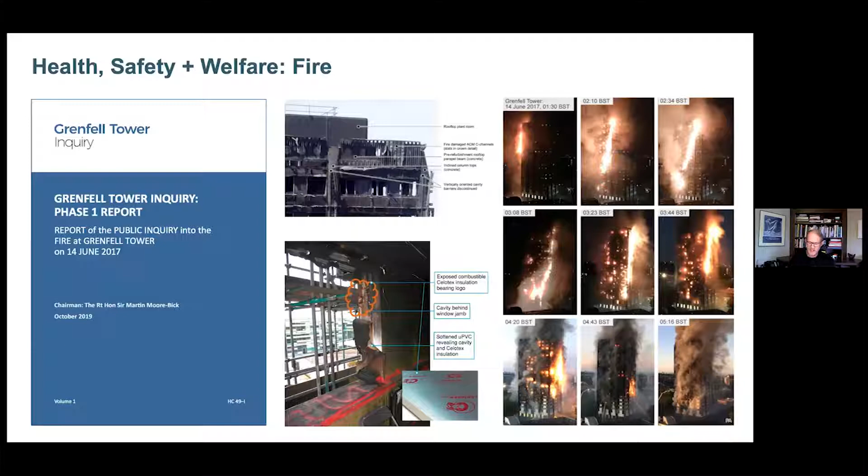Like climate change and the relationship of the building industry's contribution of carbon to the change in the atmosphere—that is becoming more and more apparent.

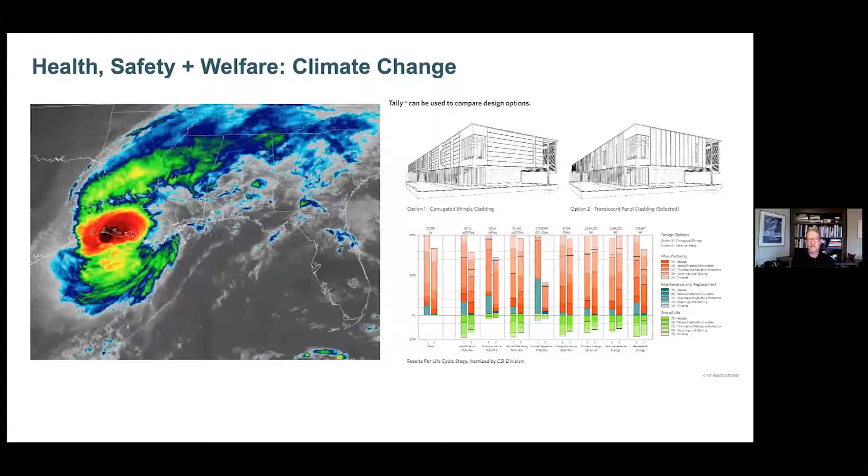There are lots of discussions going on now about issues of social justice and racial equity, and we have to start questioning ourselves about the role of the built environment in instantiating some of that inequality, and what role architects, engineers, and contractors play in creating the physical context in which those things happen.

And then something that's become top of mind, particularly for those of us in education, is that suddenly there's a strong correlation between public health questions and our skills as AEC professionals.

I suddenly found myself, as a full-time academic now—I thought I was going to get to spend the summer writing a book and doing some research and taking a bit of a respite. That turned out not to be the case, as we spent the entire summer operating as architects, with our consulting engineers and other consultants and our colleagues from the public health school here at Yale, the medical school here at Yale, and the nursing school here at Yale, trying to figure out how we were going to actually open our building here.

This is the Paul Rudolph building at Yale, where the School of Architecture is located.

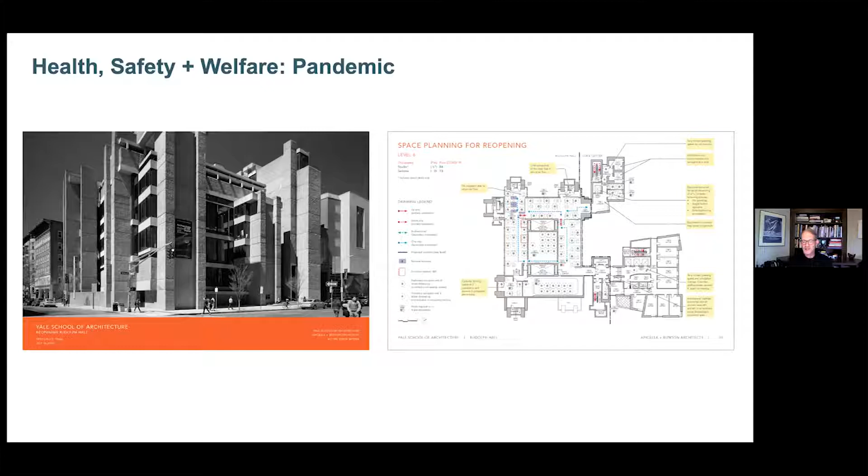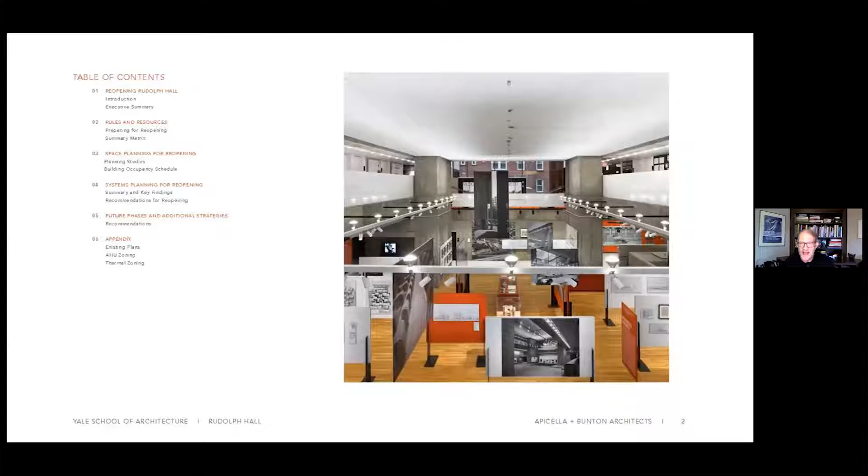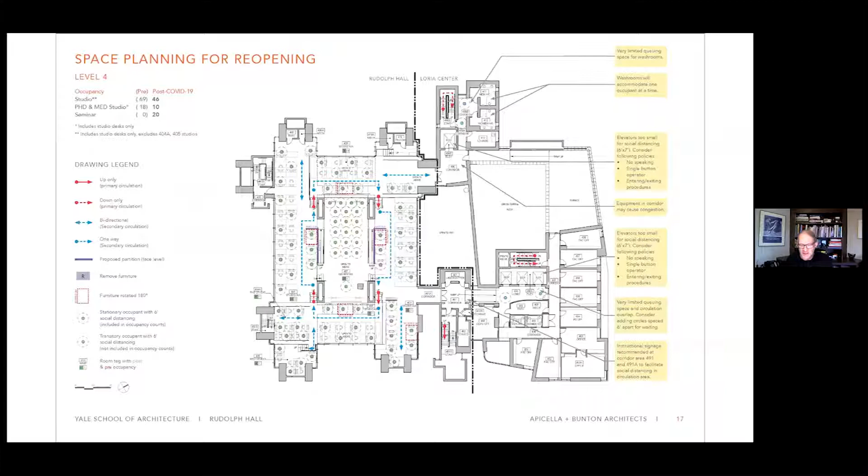We spent an enormous amount of time deploying our AEC skills in the service of figuring out how to run a building during a public health crisis, doing detailed planning of occupancy, circulation, and air quality, generating lengthy analyses that we used to present to the university administration to show we really couldn't teach architecture entirely remotely. We had a plan for how to make that happen, going through our building and analyzing every possible constriction that might create a potential public health hazard, analyzing all of the systems of the building through a lens we had never really considered before.

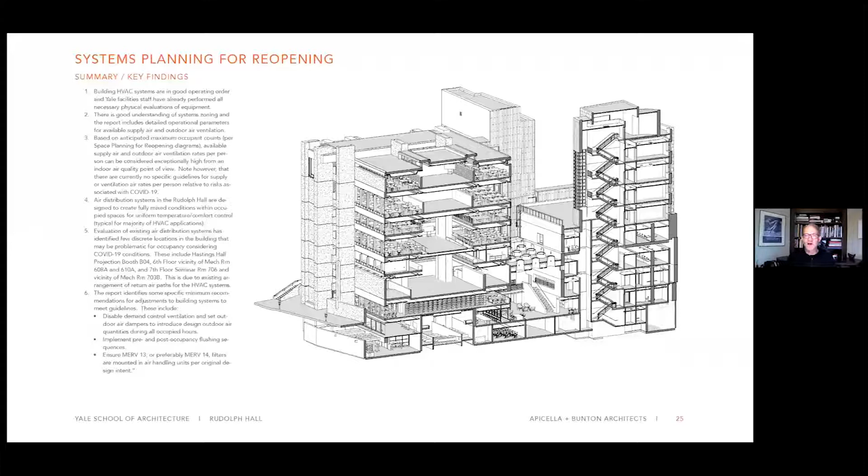We looked at what happens during a fire, how we have to redesign the building in terms of its graphics to make it operate properly, and then studied the building in extreme detail to figure out how we could occupy it to meet our pedagogical goals, allowing people to be in a studio setting while not over-occupying the building, respecting its need to change its air. We ended up doing an enormous amount of what I'd call meta-architectural work, applying architectural planning principles on top of our existing building.

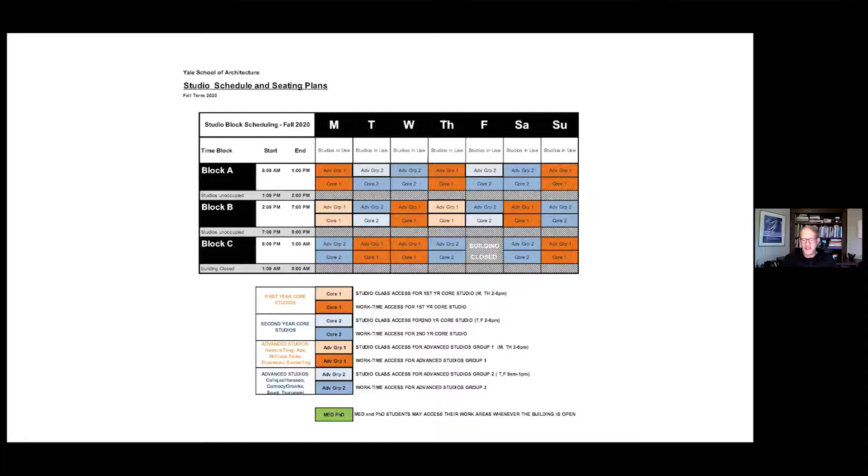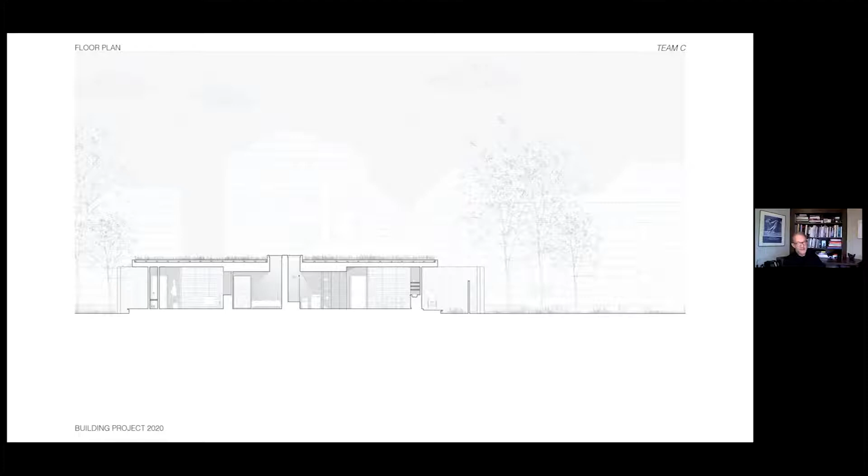So we had to reframe the entire building project this year. The students were building a 2-unit house for a homeless services organization here in New Haven. We had to reframe the entire problem so our faculty and a few of our recent graduates could act as the construction crew. Our students spent the time they would have spent doing construction really thinking carefully about how to prefabricate, sequence, and deliver this project in a much more profound way than they would have in past semesters. In past semesters, they would have done a set of light working drawings, and part of the experience was to go out into the field and figure it out there.

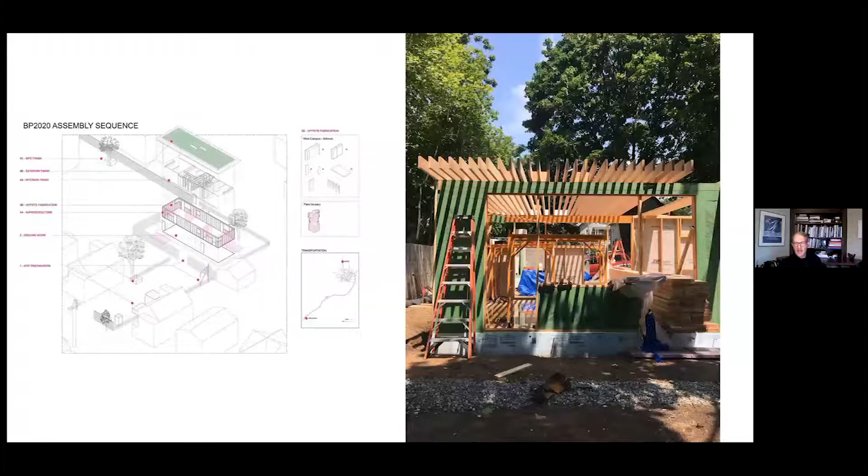And now they are having to think much more deeply about what the relationship is between these pieces.

At the same time, we're teaching a second course this semester which I think is super interesting. It's a project we're doing for the Peabody Museum, our museum of natural history on campus that does a lot of field biology work. My colleague Alan Organschi, who studies the circular carbon economy, is taking a group of our recent graduates. There was a seminar for students who were going to graduate last spring, and those students, having graduated, could become construction workers. They have designed a building for the Peabody Museum that's going to be built on one of the small islands off the coast of Connecticut—a research and classroom building based on these principles of the circular carbon economy.

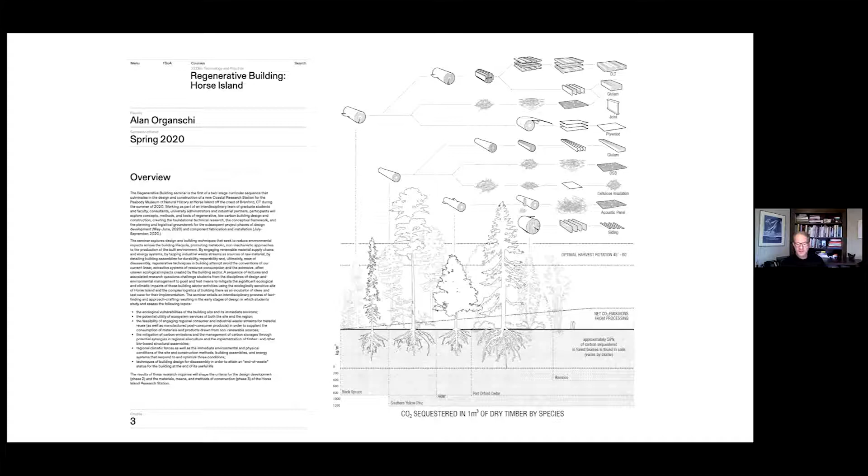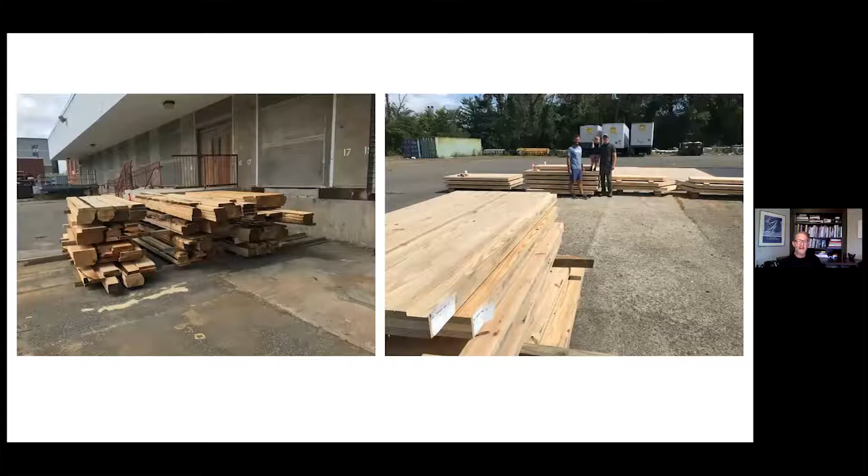So they were doing things like collecting abandoned CLT panels from the Bureau of Alcohol, Tobacco and Firearms, who builds these temporary CLT structures and then tries to burn them, or harvesting hardwood from the Yale Forestry School's forest up north in Union, Connecticut, and using these materials to try to prefabricate in a warehouse, to pre-formulate a project in a warehouse.

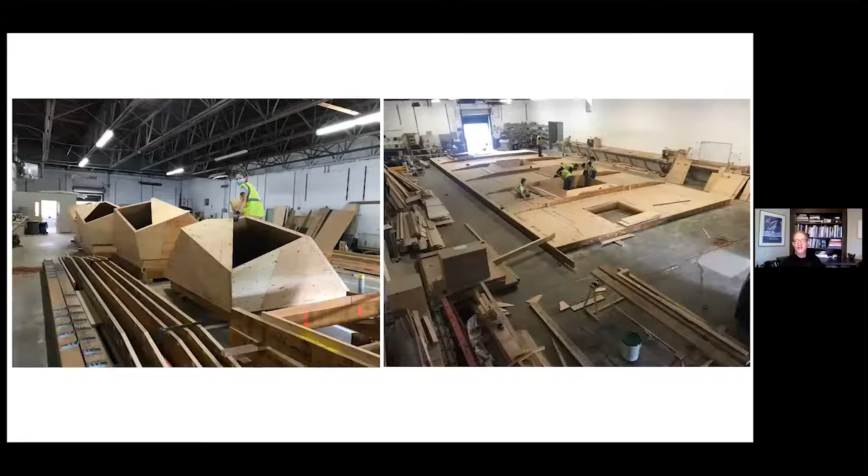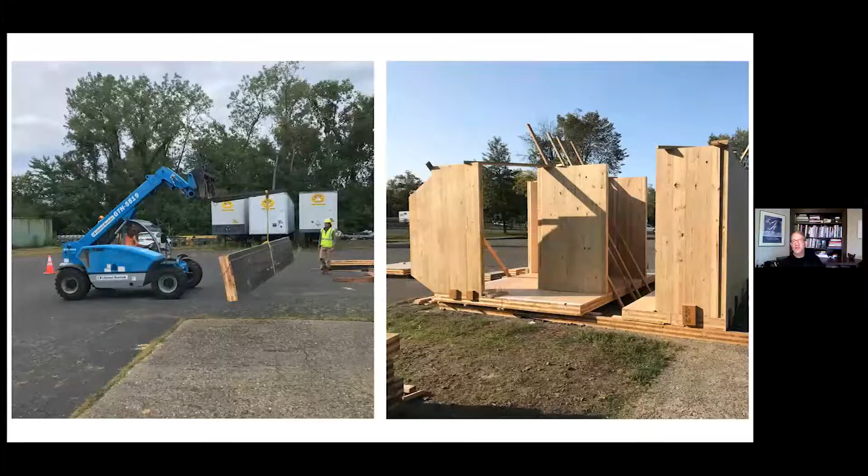You can see our recent graduates, now construction workers, prefabricating this building in a warehouse, coordinating all of the individual pieces, figuring out how to pack and ship them, practicing the construction of the prefabricated building outside of the warehouse where they're doing the prefabrication.

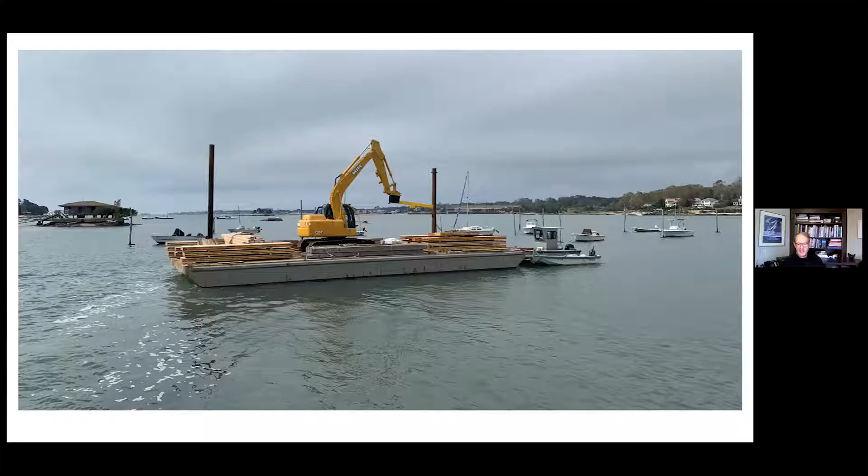Then they had to put the entire building on a barge and drag it over to this island, and then build a foundation and assemble this building on site.

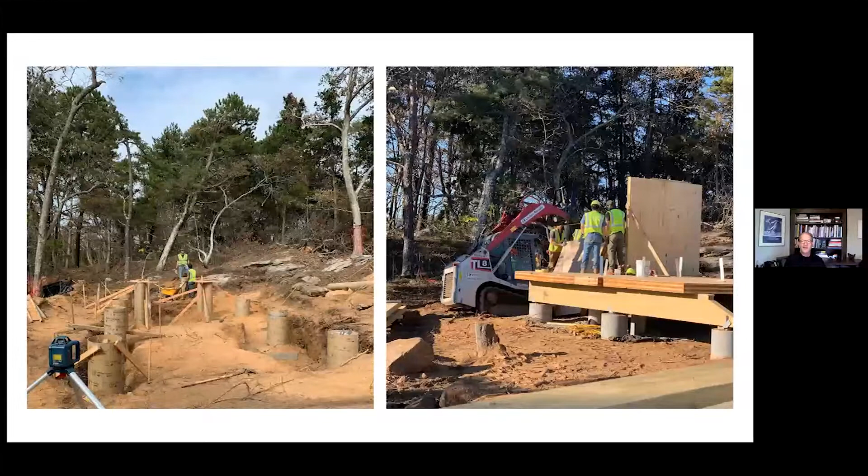And so what you're seeing here, even in a school, even in a place like Yale, which is primarily an institution focused on training the next generation of top designers, is a complete refocus on the end-to-end relationships between what happens as a decision maker, as a designer, and what the implications are of that decision all the way out to the end of the supply chain.

And so the question is, what does this really mean? And could technology accelerate that?

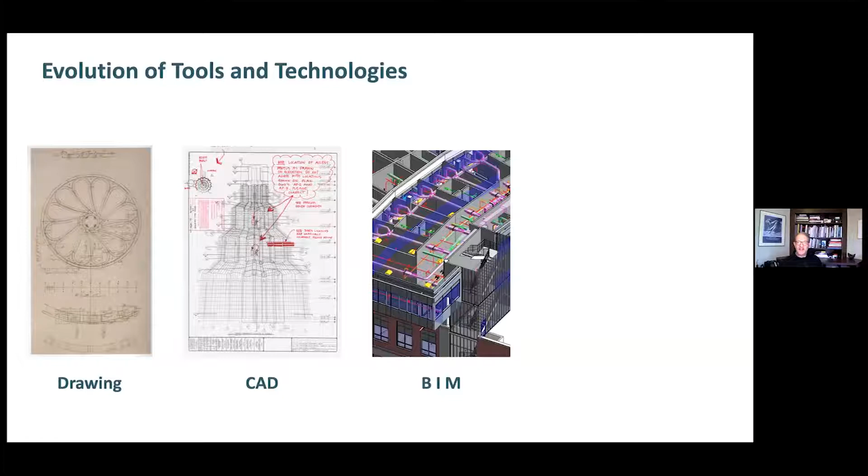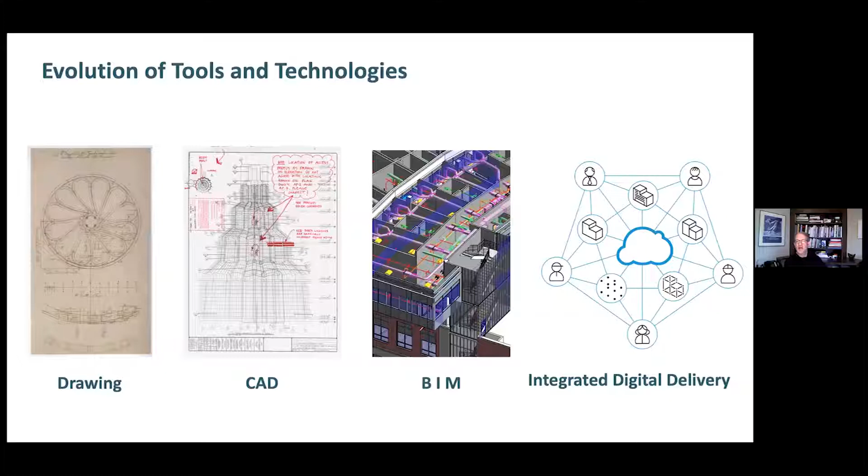When I was at Autodesk and we talked about how technology would change the building industry, we always argued that it's technology plus a couple of other extra factors. In the beginning of the BIM argument, it was the inefficiency of the building industry and razor thin margins. Now the problem has become bigger because the perspective on the kinds of challenges the industry needs to face are also becoming bigger. And so this idea that maybe there is a virtuous relationship between the pieces of the building industry as it becomes digitized might be the technological catalyst that would move us forward in that direction.

And so between Autodesk and coming back to Yale full time, I wrote this book called Architecture, Design, Data, Practice Competency in the Era of Computation.

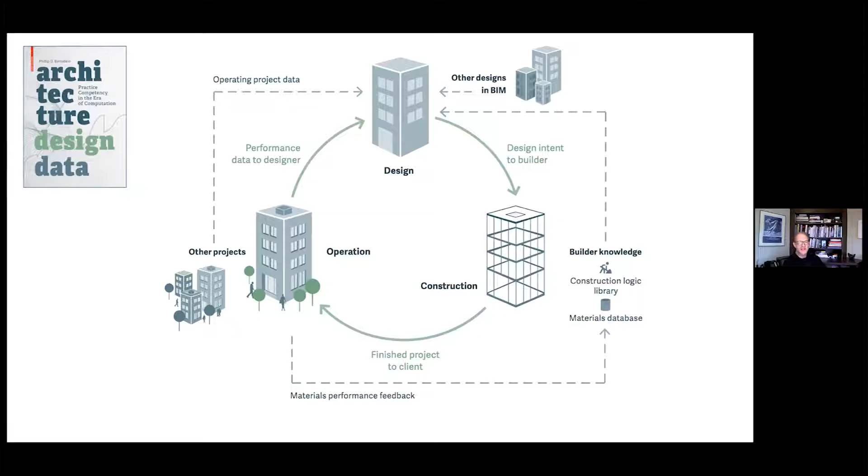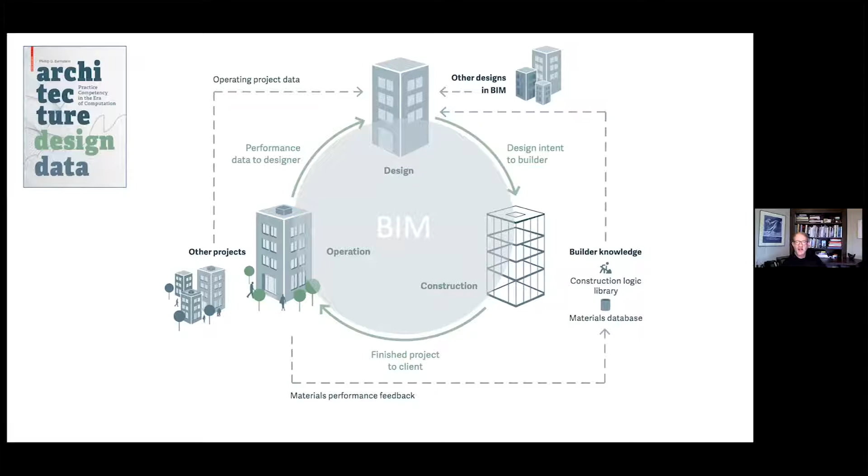Because what's really happening, in my opinion, is what I'm going to call representational dispersion. In each stage of the building process, what seems to be happening is each phase creates its own digital infrastructure and replicates the siloed processes that the paper-based process used to reflect. So you have different tools in conceptual design, different tools in building during design development and construction documents, different tools used for producing shop drawings, different tools necessary for representing and managing construction.

And now you're seeing another issue start to emerge, this thing called the digital twin. I don't even know what that is. It's some information from the Revit model, information from the Navisworks model, information coming from the owner's building control system to create something called a digital twin. But really what a digital twin is, if it were really working, is a concept that's more like Big BIM, like maybe all this stuff has a rational relationship to one another.

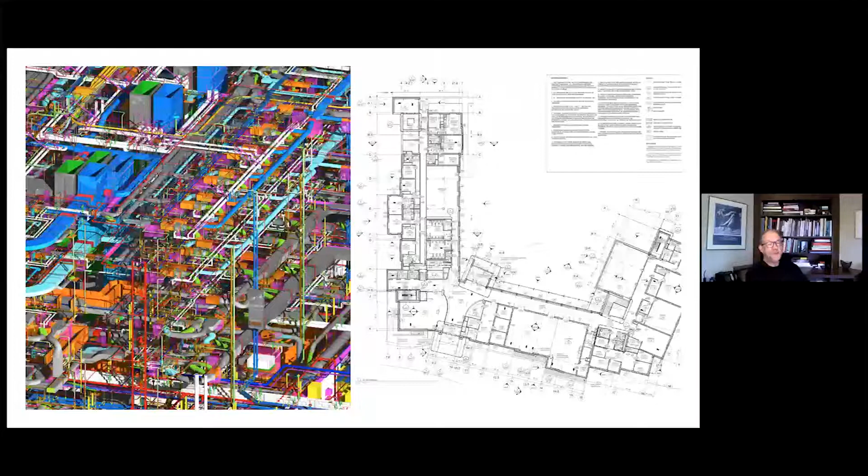But maybe now we're at that moment, because we're at an economic existential tipping point. We've got a lot of venture capital pouring into the building industry to improve the technology.

And we've also attracted the attention of the broader business community in the form of, for example, our friends from McKinsey, who've suddenly decided that construction is cool, and they're writing a lot of reports about it, including one a couple of months ago called The Next Normal in Construction, where what they essentially assert is there are interesting things happening in construction, and we're going to tell you what they are.

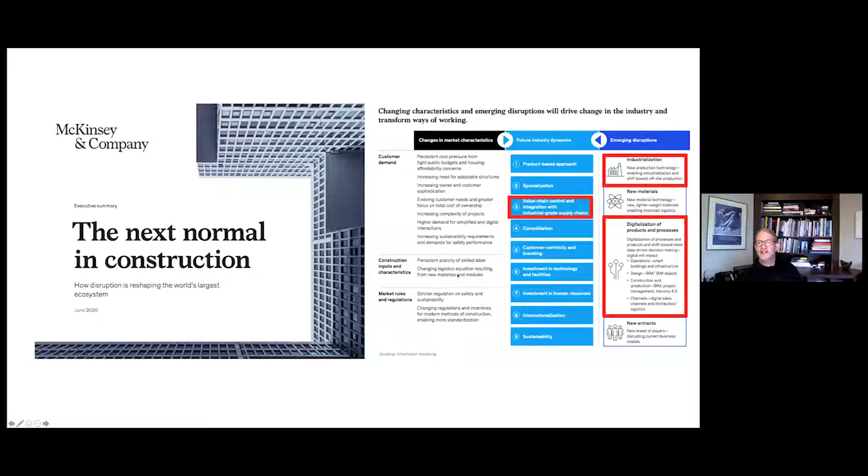If you really think about them hard, what you're going to realize is that there's industrialization happening in the building industry—in other words, prefabrication—there's digitization, but the future industry dynamic that they identify that's most interesting is value chain control and integration with the supply chain.

So this theme that I've kind of identified, that's related to some of these broader challenges, might be catalyzed by technology in a way that changes the nature of the industry.

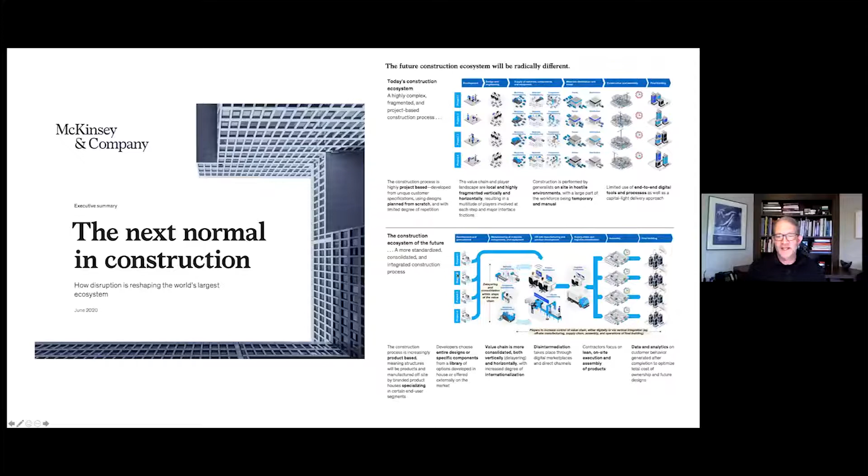So we'll stipulate that that's an interesting vision from McKinsey that's very optimistic, but the coefficients of friction are very high. However, there are beginning to be indications out there that some of this kind of supply chain integration is starting to happen.

There are examples like Mace Construction in the UK, who has this thing called the jump factory, which is essentially they build a factory, enclosed on the job site, and slip form the entire building as a factory sliding up the building. So they're bringing manufacturing capabilities to the site.

We all know lots of examples of the Katerras and others of the world. In fact, my colleague—

Renee Cheng, who's the dean of the College of the Built Environment at the University of Washington, and I are doing a research project right now where we're trying to look at, not from the top down, not from a theoretical perspective, but from the bottom up, what are examples of players in the building industry who are beginning to verticalize by combining one or more aspects of the supply chain in their value propositions.

So they integrate suppliers with manufacturing, designers who collaborate or instantiate construction activity in their business models, different kinds of relationships. And we very quickly came up with a list of about 60 different companies that are doing some form of this.

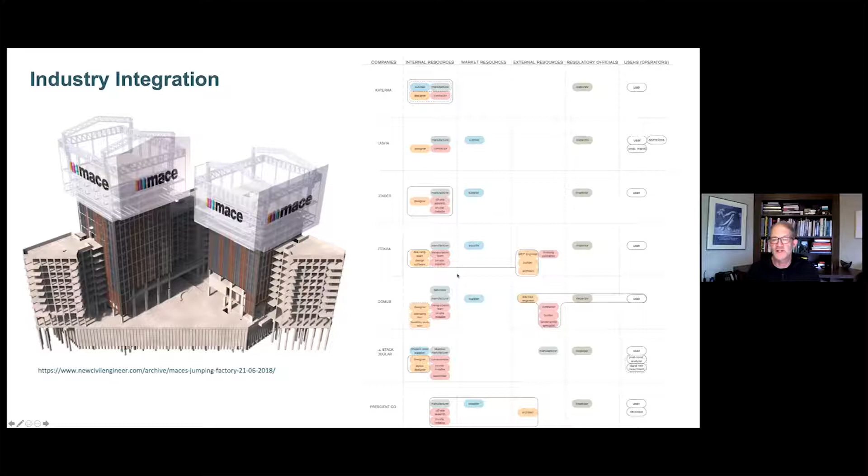So whether it's Professor Organschi's work on the circular carbon economy, where he suggests that buildings can harvest the carbon that the cities they're in create, and that carbon from that city is then stored essentially in wood products, which then become part of construction.

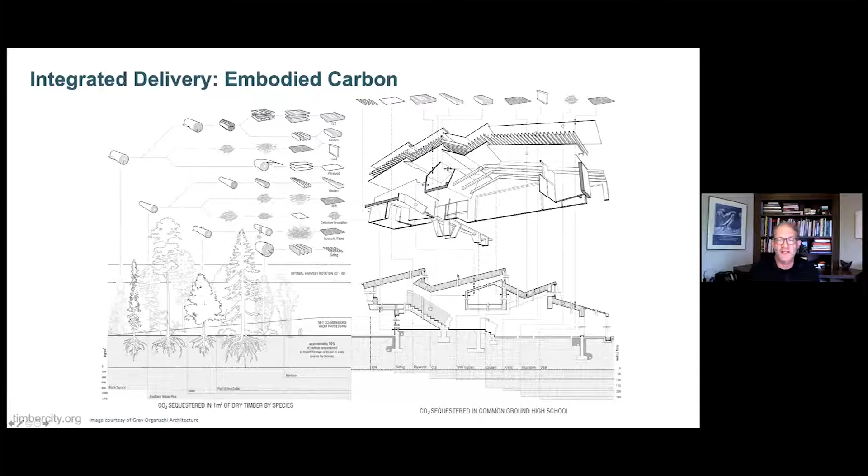So you have a virtuous circular economy.

For example, in our slavery course, I try to explain to my students that as an architect, you are 10 or 12 supply chain tiers away from an enslaved charcoal worker in the forests of Brazil who harvests wood from a tree farm that forms the charcoal, that smelts the pig iron, that goes to the steel supplier, that eventually goes to the fabricator, that goes to the erector, and that some part of your building actually has slave labor in it, even though you're 10 steps away from the process.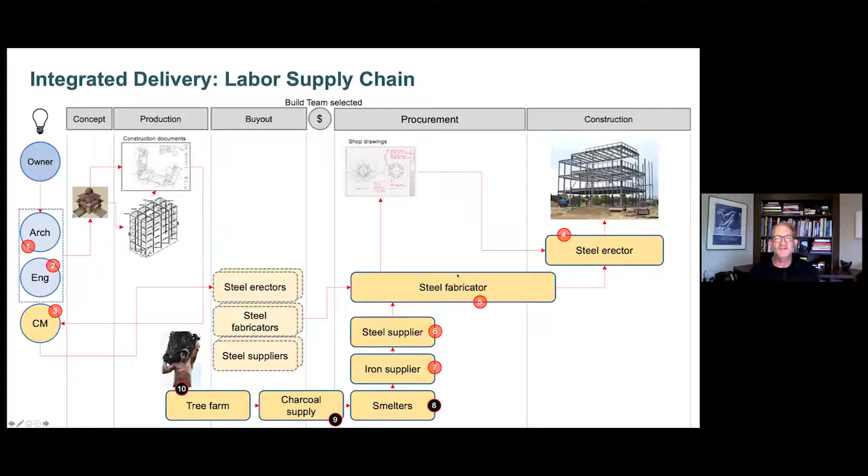If we're going to attack problems like this, whether it's embodied carbon or embodied slave labor, we've got to have a different view of the supply chain, and maybe technology is a way of doing that.

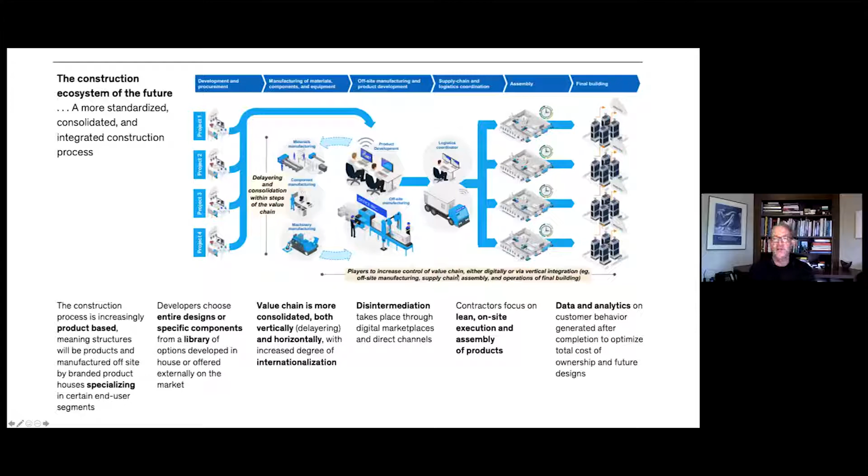What our friends from McKinsey are suggesting is one way to do that is to integrate the supply chain, create lots of information flows, and begin using manufacturing techniques to make that happen. I think that may be too simple an answer, because it doesn't address the problem of how to disintermediate, to use their term, the lack of relationship between the various players in the process.

There are likely two more technologies that might help us do that: generative design and scripting. In other words, the use of algorithms to manipulate data, and machine learning and artificial intelligence, where computers learn how to create the relationship between pieces of information by studying vast amounts of information.

What we have in AEC now is an emergent condition where BIM simulation and data management tools have created increasingly large piles of digital information with no relationship to one another.

So maybe the idea going forward is that we can understand the supply chain, we can understand the relationship between all of these processes, and we can create this idea of a digital twin that I'm going to call an integrated digital twin, by layering on these additional technologies that create the relationship between the pieces.

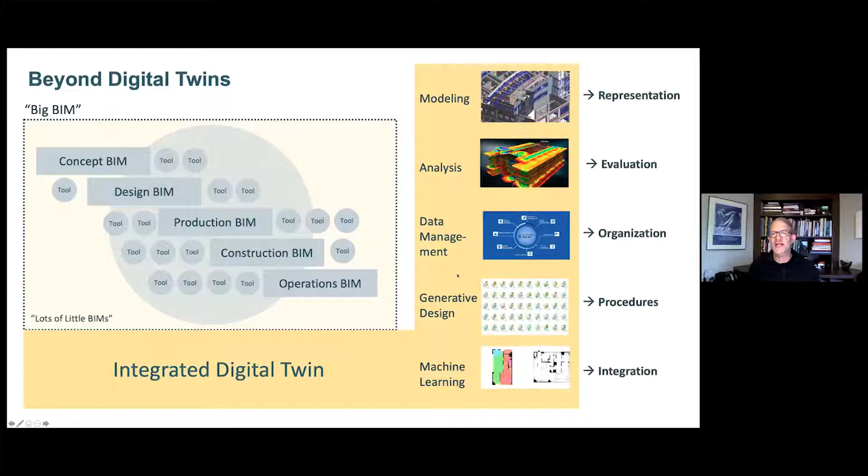Because if we wait for the building industry to create its own intergalactic theory of interoperability, that will never happen. There are almost no financial incentives for doing that, even when there are major players in the marketplace like the Katerras and the AECOMs of the world that might choose to work on it, but they can't attack the disaggregation of the industry. One of the reasons they can't do that is we need external investment in the AEC industry, because there aren't enough internal resources to figure this stuff out on our own.

If you look at some of the statistics from our colleagues at Zweig in terms of what they see about growth patterns in the AEC industry, the vast majority of our colleagues in the U.S. industry are not in super fast growth mode, and therefore they're not generating super large margins. At least 40% of them, according to Zweig, are only making average profits, and average profits in the AEC industry are 1/5 of what average profits are in the technology industry.

So there's a tremendous amount of margin pressure on the players in the industry, which creates a disincentive for innovation and trying new kinds of stuff. So the ideas for new kinds of stuff largely have to come from the outside, from other sources in the supply chain, which is why it's so important to have a broader view.

Then the other context, of course, which we have to look at is the current economic circumstances. I track very carefully the AIA's Architectural Billings Index because it correlates pretty strongly to the construction economy and, frankly, my students' possibilities for getting jobs.

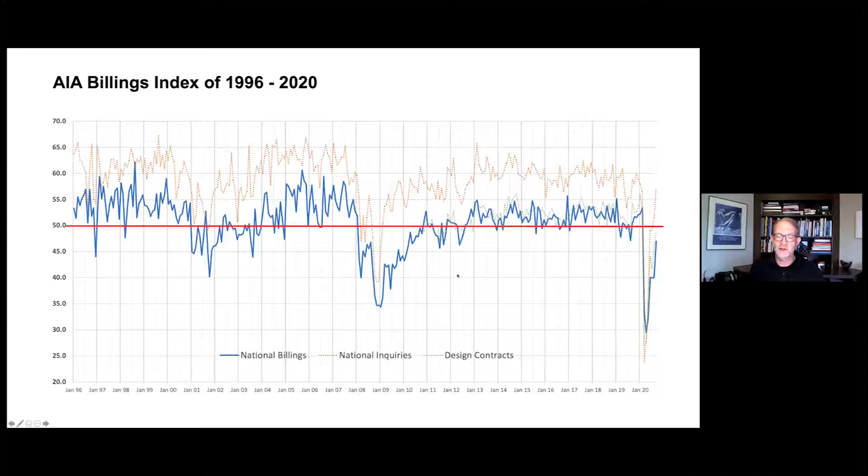The ABI shows a very strong correlation between global economic conditions and how the Architectural Billings Index actually works. So those of you who've been around for a while, like me, every 6, 7, 8 years you get a recession. This one took a little bit longer, right? This one took 11 years, and then it really hit us hard.

I've been keeping this graph for a long time, and in March of 2020, I had to change the scale on the graph because the Architectural Billings Index, which works on a scale of 0 to 100, where anything above 50 means growth and anything below 50 means contraction, went down to 28. So it was pretty scary. Here's a zoom in.

The problem is our industry has this bizarre bilateral strategy: when things are going really great, we don't invest because we're putting money away for a rainy day. And when things get bad, we don't invest because we're spending the money we put away for that rainy day. So the question I'd like to introduce is this: if we take the perspective of the broadest set of issues germane to this building industry—our ability to deploy certain kinds of technology, to understand the relationship between all of those players—is this existential moment we're in after the pandemic the time when we can really begin to attack these problems?

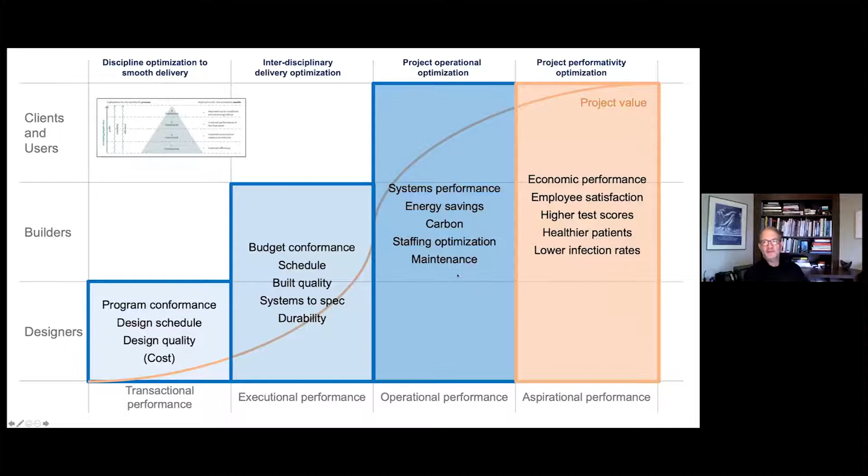In other words, as we hand off traditional deliverables between phases, we actually degrade the quality of that information, but there are actually a series of opportunities that we could apply that would increase the quality of that information as it goes through the supply chain.

As a consequence, it gives us an opportunity as AEC professionals to start thinking about buildings as relationships of systems. This is a different perspective than thinking about a building or a built project as a supply chain problem—that there are a whole series of systems, economic, energy, I just picked some randomly when I did this diagram, that suggest a construction project has to be looked at in a series of frames of reference.

The supply chain is one of those frames of reference, and we need to look at the relationship between those frames and the degrees of resolution and scale to really understand when we make a decision about how to build a building. The choice we make about a window affects the overall planet, it affects the region, it affects the neighborhood, and it clearly affects the building.

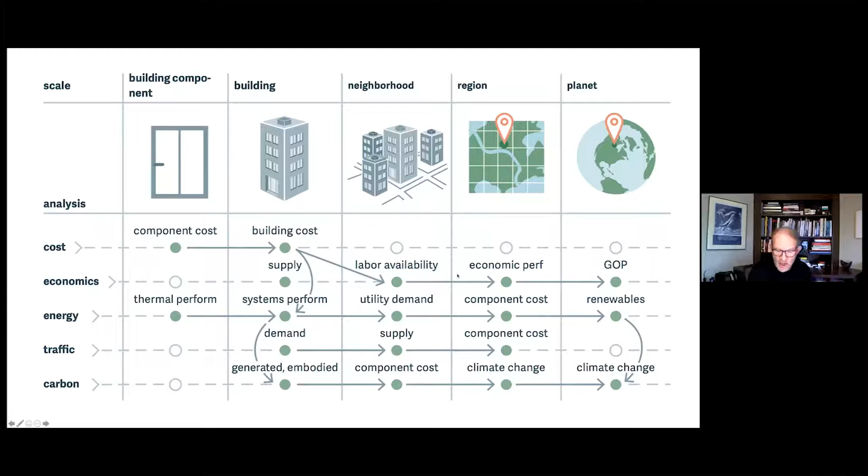If we can begin to consolidate our representations and our digital tools, but choose to look at the problem in a more comprehensive way, we can change the value proposition of the building. So my argument essentially is the following.

Right now, what we have is a world where the agency of designers and builders is this weird combination of professional standards of care on the design side and product standards of making things on the construction side. And the way we deliver those projects is by iterating during design—trying out lots of alternatives until we find one that we think works, using our intuition and judgment to pick one, and then delivering those projects through fixed deliverables like a fixed price construction contract.

And the value proposition is pretty straightforward: we compete based on price, and whoever has the lowest first cost wins. If we're able to look more comprehensively by taking advantage of this pandemic moment to re-examine our processes, there's a different future state that's possible out there.

The relationship between design intent and construction execution could be combined in a strategy around the control of information and the integration of information across the supply chain. We could use these digital tools, analytical tools, machine learning tools, and building information modeling tools to be much more systematic about how we explore problems.

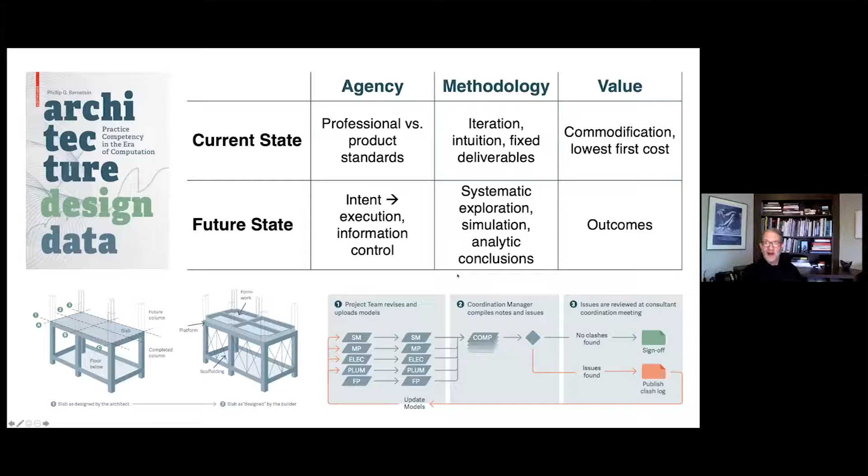We can be more systematic about how we predict outcomes, what we think is going to happen, and draw analytical conclusions correlated to those higher level aspirations that our clients have, so that ultimately the value proposition of the building industry becomes one of outcomes instead of commoditized first cost.

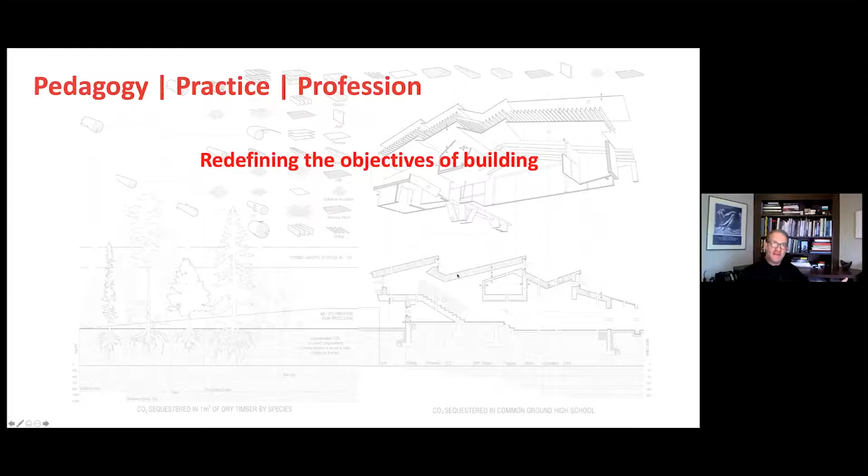Ultimately, around this question of pedagogy, practice, and the profession, to me the big themes have to do with the following: number one, can we redefine the objectives of the supply chain? Can we redefine the overall objectives by looking at the supply chain and its relationships, the information flows, our obligations, and our value propositions in a different kind of way?

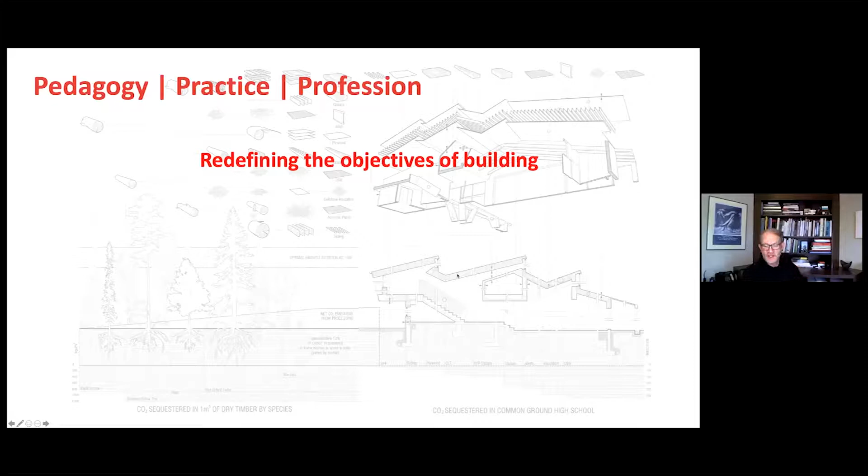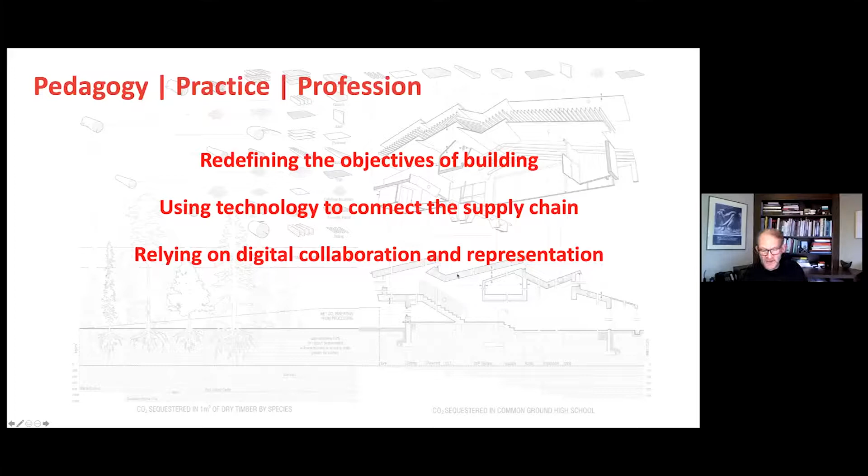Can we use technology as a tool that combines those things? Can we rely on the skills we're learning during the pandemic around digitalization, the exchange of information, representation, analysis? We're all doing our classes almost entirely virtually now. Instead of looking at that as a disadvantage, is it ultimately an advantage? That might result in a stronger integration between the components of the supply chain, at the top line design, construction, and operation, and at the bottom line all the way down to the carbon that's generated, to the worker who needs to be taken care of, to making a series of responsible decisions. What we'd want to move toward is a series of delivery models much more strongly predicated on outcomes and much less correlated on commoditized exchanges of value.

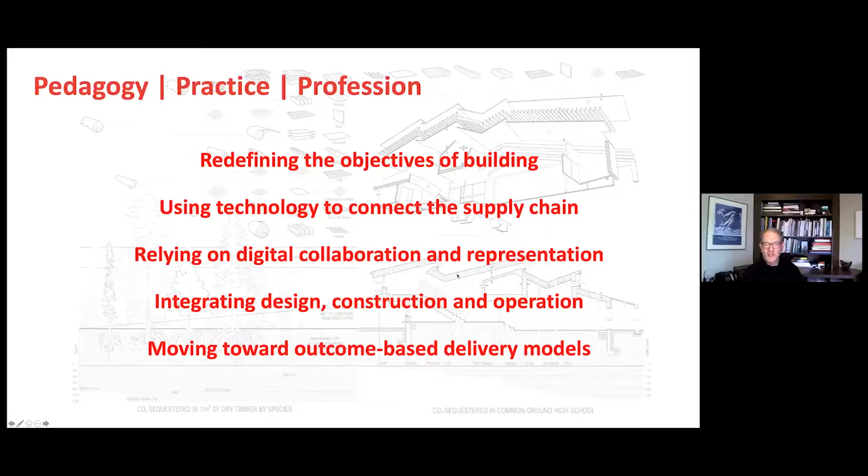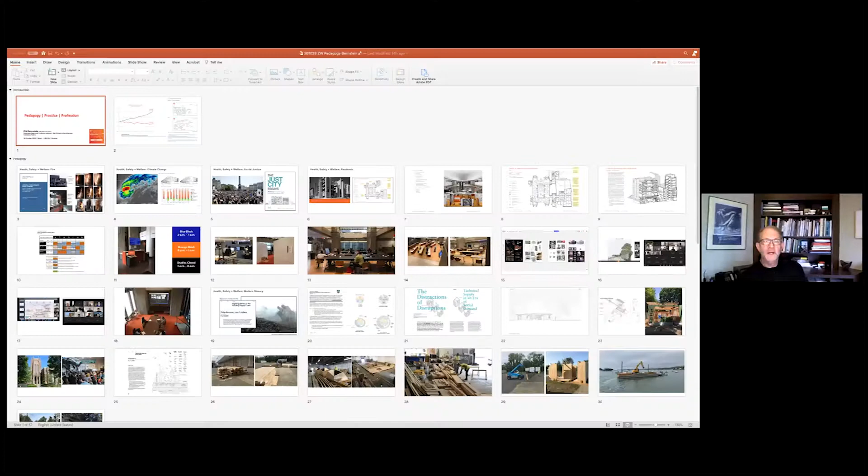So with that, I don't see any questions, but I'm happy to take some if there are any. How'd I do here, Chad? Like 50 minutes? I think that's where I am. So are you guys probably think I'm smoking weed here, right? Are there questions? Okay, all right.

So Katie's question on the current state is extremely compelling: who should lead the charge? Oh, that's such a great question. It takes a team, etc. That is a really, really great question.

When we first started the BIM initiative at Autodesk, I watched the entire discussion, and I was part of the groups driving the technology change, working on BIM standards, talking about IPD. Early on, it was a power struggle. The architects were thinking, okay, we can use BIM to weaponize our power and control over the construction industry. My contractor customers were saying, well, we're finally going to have something to beat these architects and engineers into submission. And the owners were saying, well, maybe if we force these people to use BIM, we'll have fewer change orders. It was all an exercise in power and control. But the reality is there's no one who has power and control in this construct.

The people who have the most leverage are the clients, and until clients begin demanding a different set of results, I don't think things are going to move as fast as possible. This is top of mind for me right now because Lou and I are teaching a seminar on forced labor, and it's exactly the same question around a different set of issues. An architect, an engineer, a contractor, we have no idea who that worker is all the way at the end of the line - that nine-year-old girl in India crushing gravel that's going to end up in my foundations, or that guy harvesting wood, enslaved in Brazil, that's eventually going to become my I-beam. Until clients reach levels of consciousness about these issues, whether it's how inefficient their projects are or other problems, the industry will not move. So there's going to have to be some consciousness raising, I think.